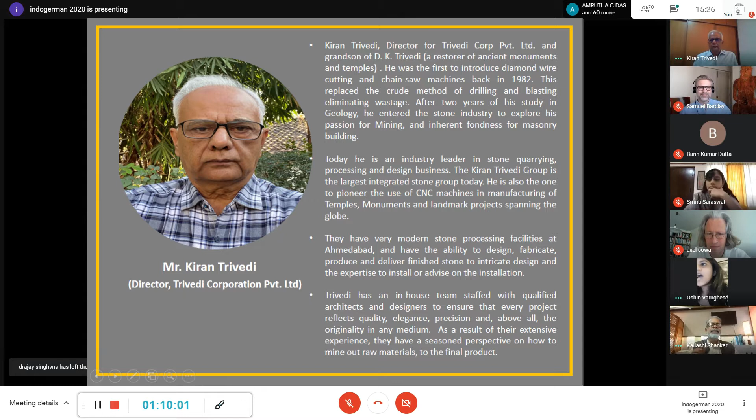Mr. Kiran Trivedi, director for Trivedi Corp Private Limited, was the first to bring mechanized marble quarrying and fabrication of stone to India in the 1970s. After 2 years of a study in geology, he entered the stone industry to explore his passion for mining and for his inherent fondness for masonry building.

Mr. Trivedi revolutionized the marble industry in India. He was the first to introduce diamond wire cutting and chainsaw machines back in 1982. This replaced the crude method of drilling and blasting, totally eliminating wastage. He's also the one to pioneer the use of CNC machines in the manufacturing of temples, monuments, and landmark projects

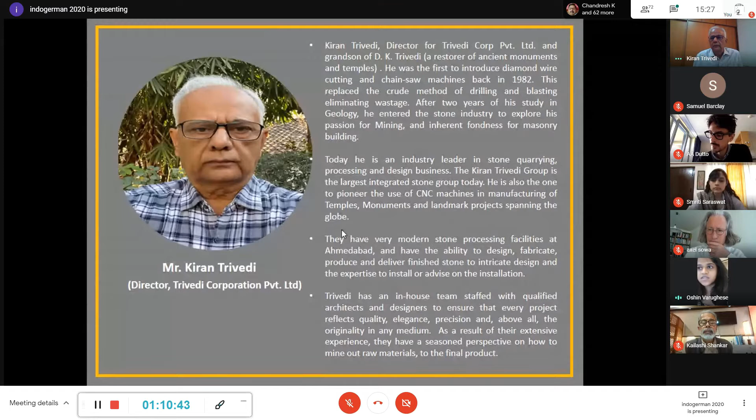spanning the globe. Continuing to lead, he is the very first to bring the process of underground marble mining to India. And through his technology, he will continue to innovate and shape the way the industry is run here. May I now kindly call upon Kiran sir to give his talk, Art of Using CAD CAM Technology in the Stone Industry.

Hi. Hi, everyone. Hello. You can check now. Hello, sir. Okay. I hope you can hear. Hello, this is Kiran Trivedi here. Yes, sir, we can hear you. Okay.

I would like to start with some old. I'm into the marble quarry mining, and then started the CNC technology. And basically, we are the temple architects since my grandfather's time. So, I would like first to share one picture, an 80-year-old picture, when the Ranakpur temple was built, with all the architects and contractors who did the Ranakpur temple. I would like to show you some pictures of the Ranakpur Mandir.

See, when we talk about this Ranakpur temple, we consider it one of the best temples in architecture, as it has a very big building with more than 1,000 columns, and the best art here. The levels are different. It is known for the levels and the lights. This temple is more than 500 years old.

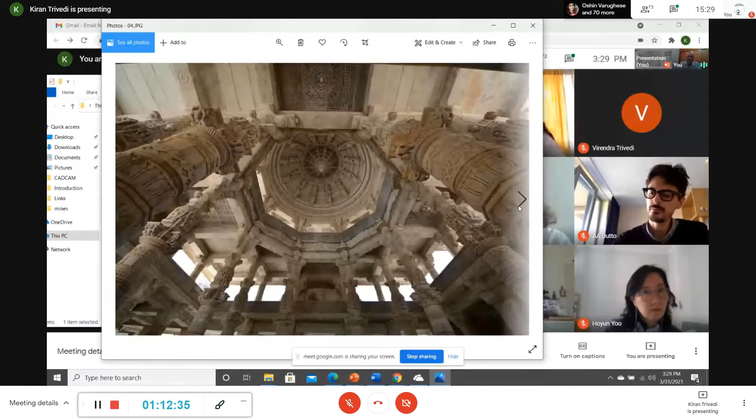And my grandfather did the restoration of this temple. And that's how it became at that time the school of architecture, where people were learning about temple architecture. Because in temple architecture, we don't use steel at all. By not using steel, the life of the monument goes to more than 1,000 years. So temple architecture is completely different, without using any steel.

I just put the quarry. These are a few more pictures of this Delwara temple. We'll move to the marble quarry. In marble quarries, we have this quarry. We have been working in this quarry for the last 70 years.

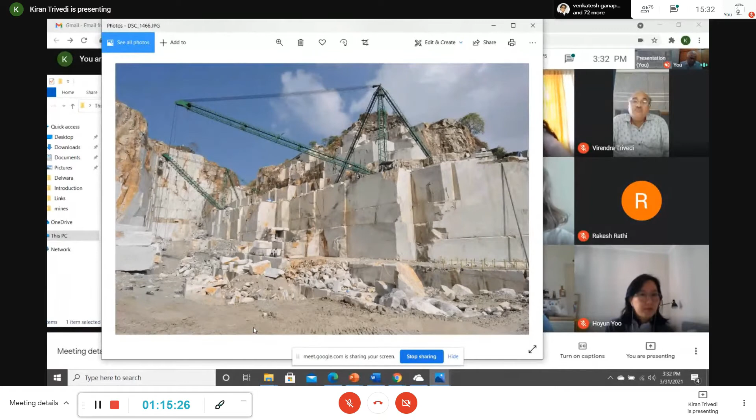If we take the stones for a beam horizontally, then there are chances of breaking the stone. The stone can break, the beam can break. In sandstone, which is a sedimentary rock, the stone should be used horizontally. Anyway, we don't get sandstone in vertical formation. But in marble, it's very important that we use the stone vertically by understanding the nature of the quarry, because all the cracks run vertically, not horizontally.

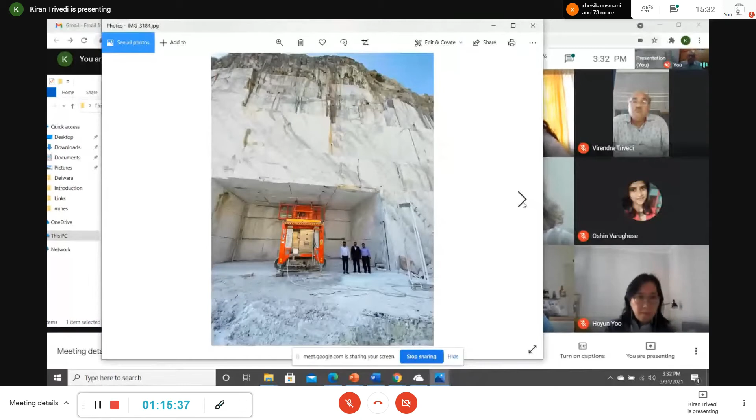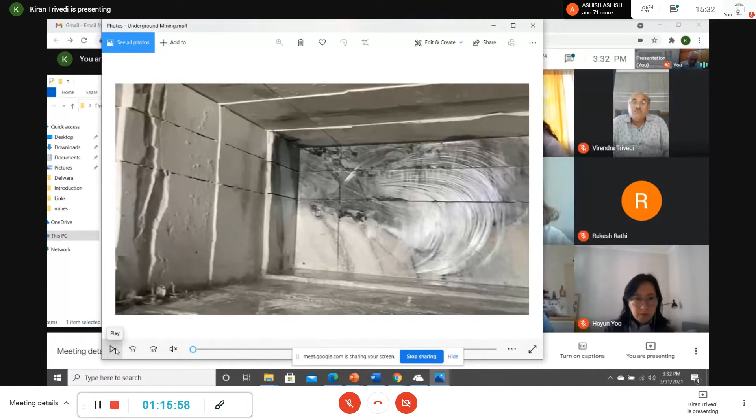That's the reason. So now I move to the underground. We have these quarries and underground tunnel mining in Europe, in Italy, and in many countries. It's been going on for many years. But in India, it's the first time we are going underground. We made an underground tunnel. The purpose of an underground tunnel is when open cast mining is not feasible, when the overburden is too much.

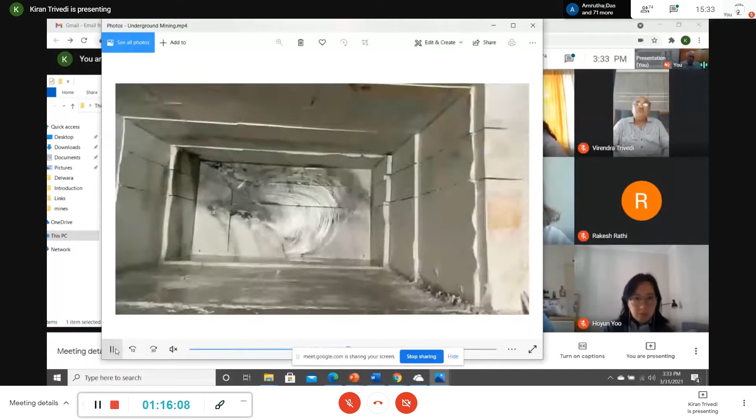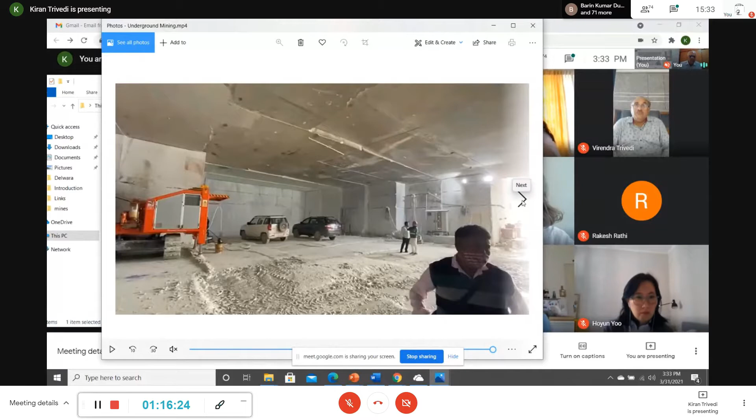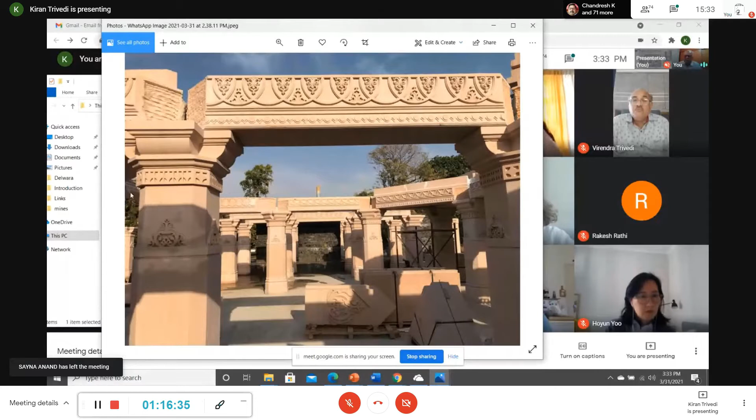So this is what we did, a tunnel inside, and we have a special machine for that, again from Italy. It's a chainsaw machine. It moves in the 5.5 meter height and goes 3 meters at a time, and we can go any length. So this is the first underground marble mining quarry in India. We started 2 years back. This is one temple, and regarding the beam, mostly the structure is columns, then beams, and then we construct the domes on that.

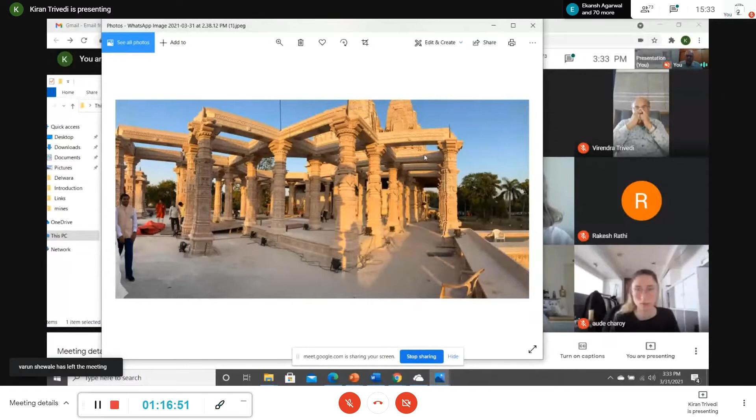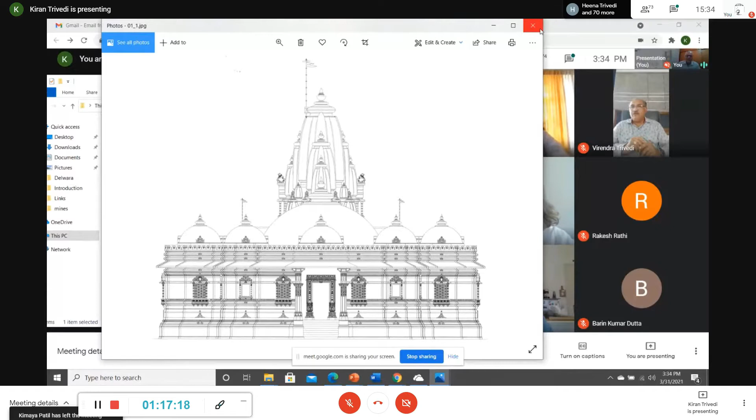We did many projects. This is the first CAD drawing we did around 25 years back. In the old time, the drawings were done manually, and first we converted this image, we vectorized the image, and this is the first temple we did in UK. That's the Krishna temple, where we used a CNC machine for the first time to build this. Next.

Like we have in the old time the Delwara temple, when we talk about the Delwara, we talk about the Ranakpur and all, we see that good workmanship, and they were very good artisans. My goal, I want to show what we are today, how we can do something better. Of course, they were the best, but we can say we are better than ever. We have the best technology today.

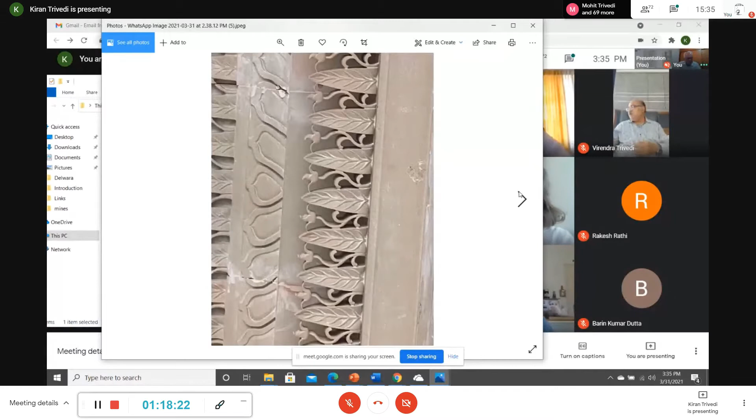So I tried here to use the CNC machine and water jet. So we combined manual and CNC and water jet together to give the best result. You can see here the ceilings, and we did it in a different manner. We use some technology. Everything is done with manual and CNC both. We use the CNC machines 80%, and the rest is manually done.

Now, when questions come from people, when we use CNC machines, what happened to the artisans? But when I did this temple, we employed around 300 artisans after we finished the CNC work. So all the CNC machines we talk about, they do not replace artisans, but they help artisans. Okay.

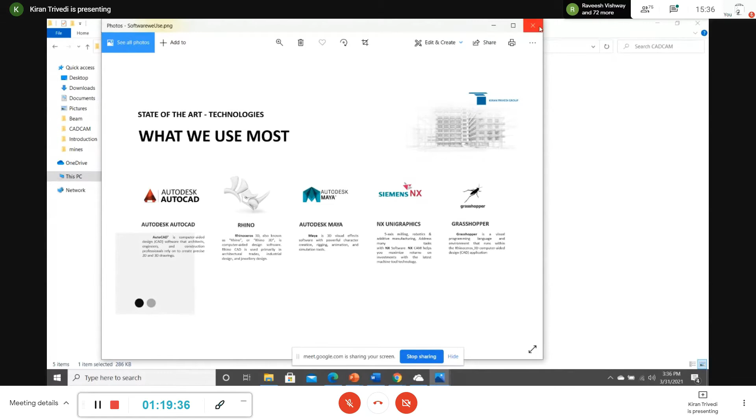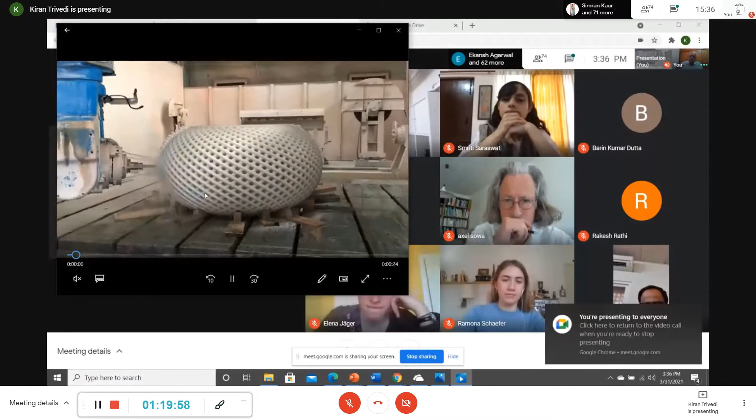We use the softwares. For the CAD side, we use AutoCAD, Rhino, Maya, Unigraphics, and Grasshopper, and mostly ArtCAM is used. Now the way we use it, this is one of the examples. This piece is designed in Rhino, and we are machining with the 5-axis machine.

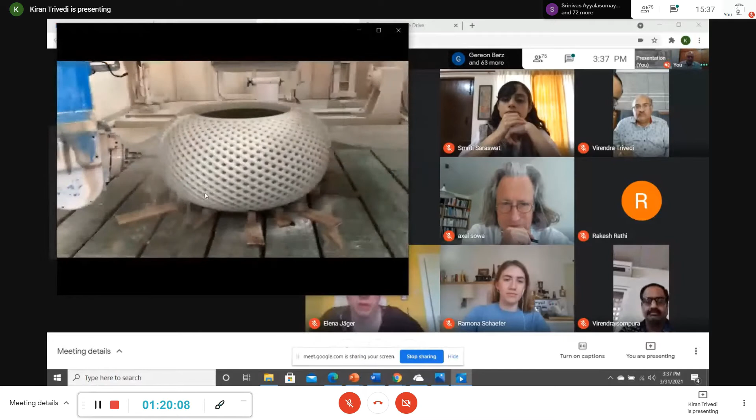So how to use CAD-CAM, and how to take the best advantage of designing and doing the machining, that's very important. Many people have the machine, but they don't know how to take the best advantage of that. When we talk about machining, the main part is the costing, of course: how to make a piece economically, how to reduce the timing of the machine, because these machines are very expensive. So we reduce the time of the machine by learning, and every day we learn how to use the machine and what software we should use.

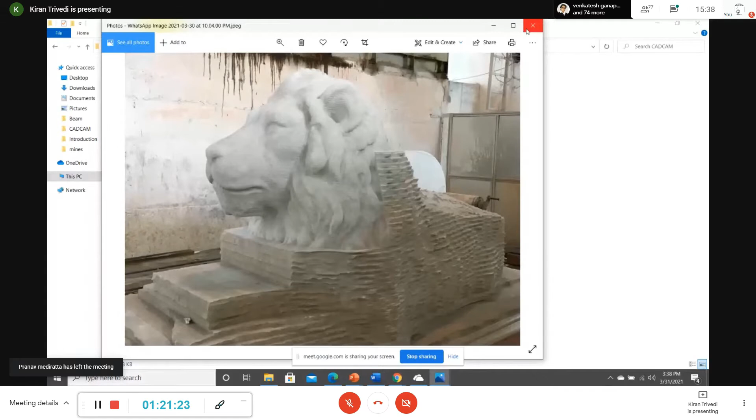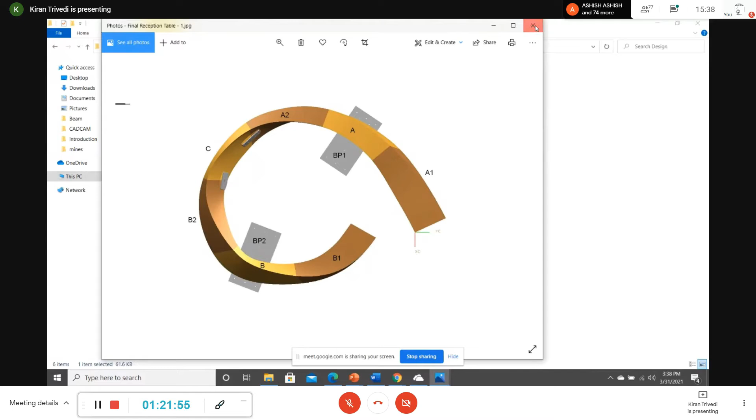Okay, I would like to show you one very interesting project we did. It was in Harvard Medical School, Dubai. This table is 5-meter diameter, and the first time we used Unigraphics software. The table is resting on 2 points. It's designed by a British architect. We put some steel inside, and I will show the real image. This is how the software and the CAD-CAM system helped us.

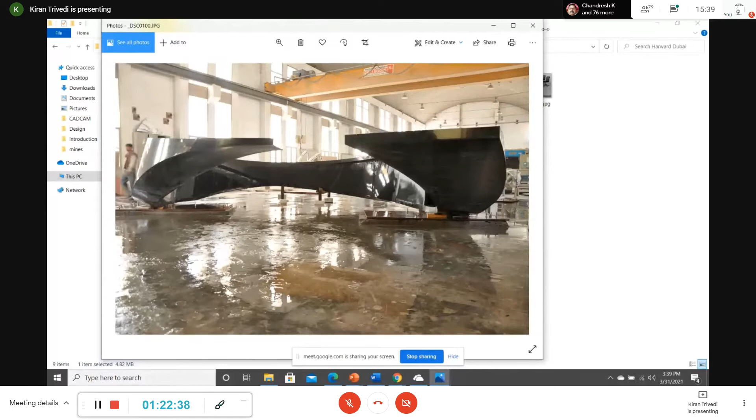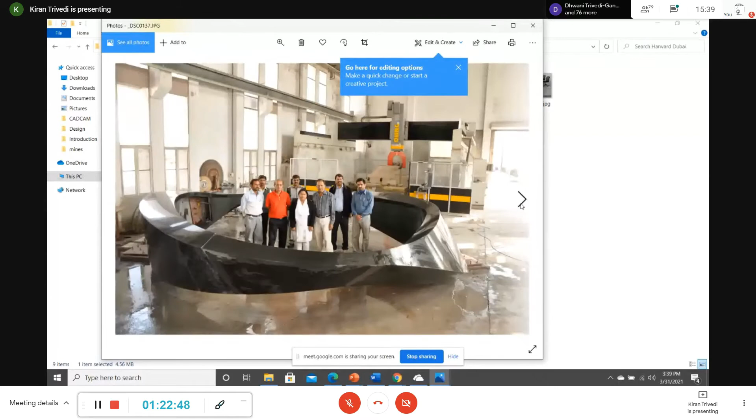Here we go to the picture. This we installed in our factory to do all the tests. This cantilever is 3.5 meters. One solid stone is hanging and resting on these 2 points only. Yeah, you can see this is resting on the 2 points. Go back. What stone is that? It's a black granite. Yeah. And this one is the installed piece there in Dubai.

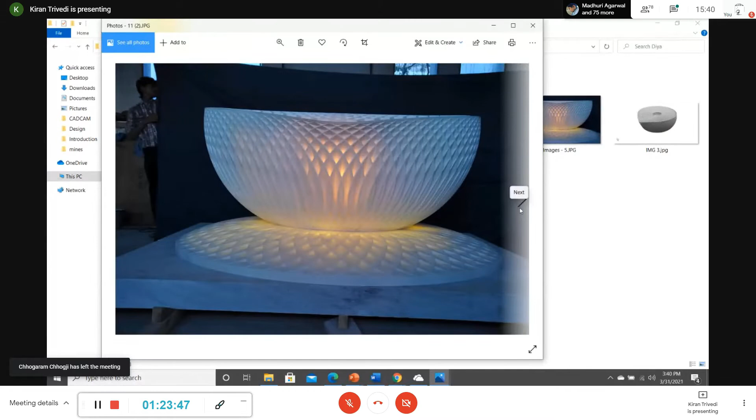So the thing I want to convey is how this new technology with the new software helps in the stonework, and how to use this software, the designing software as well as the machining software. This was designed in Rhino. We did the design; it's installed in Delhi.

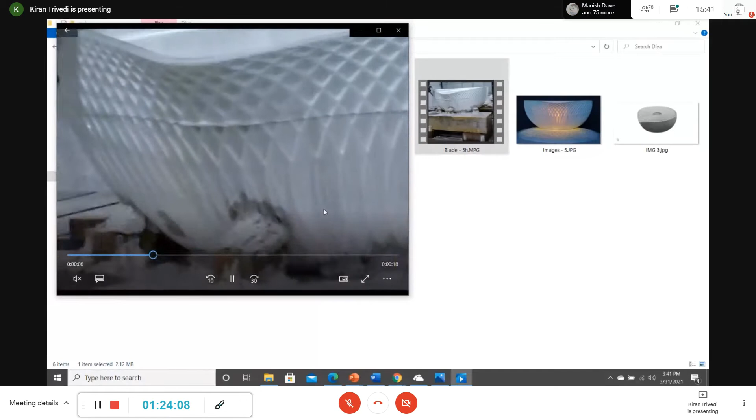Again, this is machining. The product is designed on Rhino software. It's marble. Is it marble? So is this for the Ministry of Culture? Yes, that's the same. Yeah, I recognize that one. So we put this too. Preksha Vaid designed it from Delhi, and she did this project. She's an architect in Delhi. Okay.

So when I talk about scanning or any software we use, finally what we need is the STL format file. The machines where we use the program, the Easy Stone program, read the STL format file. So whether we use Rhino or Unigraphics or any other software when we want to do 3D, we always need an STL format file, which the machine can easily read. Okay, then.

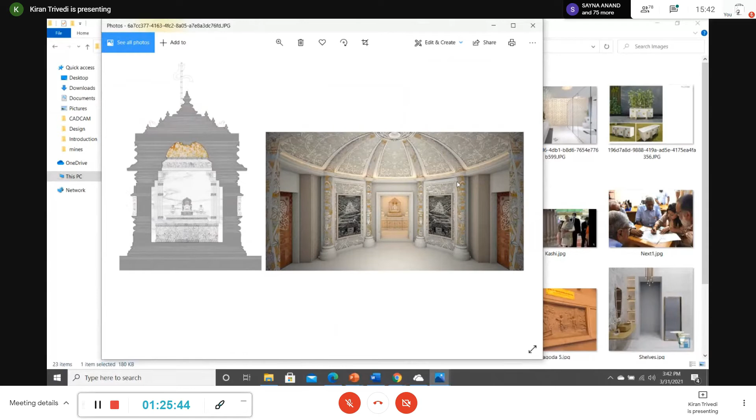This is the new temple we are doing. My daughter, in fact, is an architect and she designed it. And we are using two stones there. This we are going to start soon.

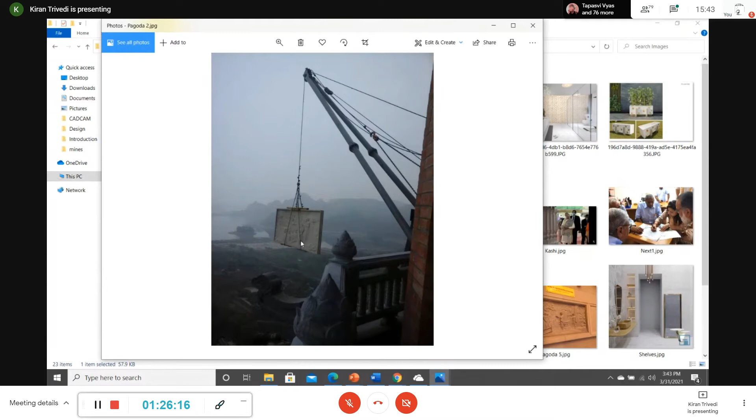Then this one is a pagoda. We have not restricted ourselves to temples only; we did a few gurdwaras in England, one in Glasgow, and 3 big pagodas in Vietnam. So we studied the Buddhist culture. We did these panels. First we made them in clay. After that, we scanned them, and after scanning, we did them with a CNC machine.

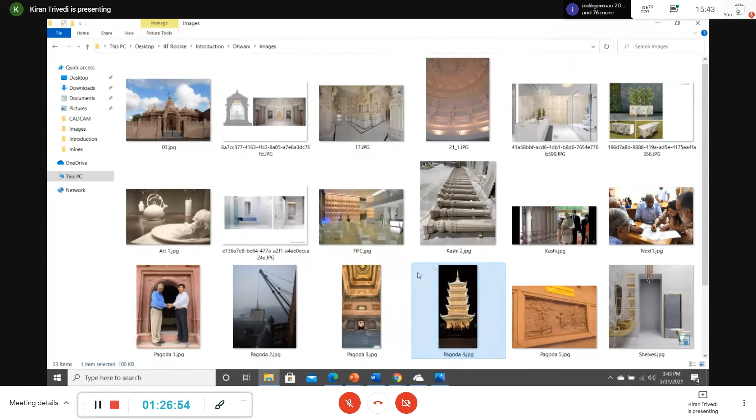This is one of the recent pagodas we finished last month. It's a 5-story, 100% done in stone, the same way as the Sompura architecture. No steel is used inside. It's 5-story, 100% granite, red and black granite. We finished in the COVID time because there was no COVID in that area.

Oh, this is one of the ceilings we recently did using the technology of water jet and CNC machine.

This is one project going on right now, the Kashi Vishwanath temple. Of course, all the columns are done on CNC machine, but when I talk about the CNC machine and the manual craftsman, after doing it on machine, about 15% we spend on manual carving just to finish it. Today more than 150 people are working just on finishing the carving done by CNC machines.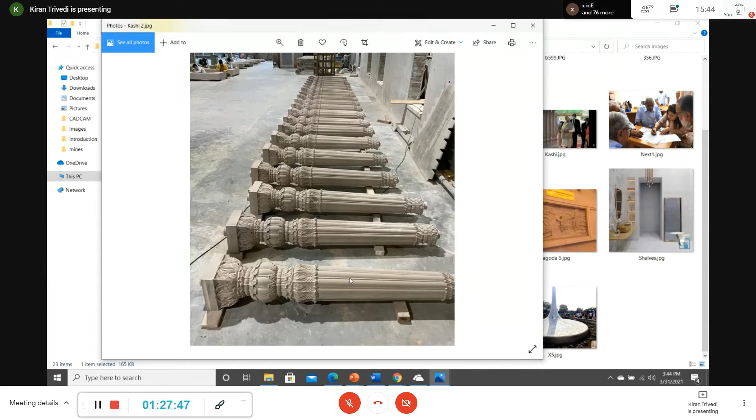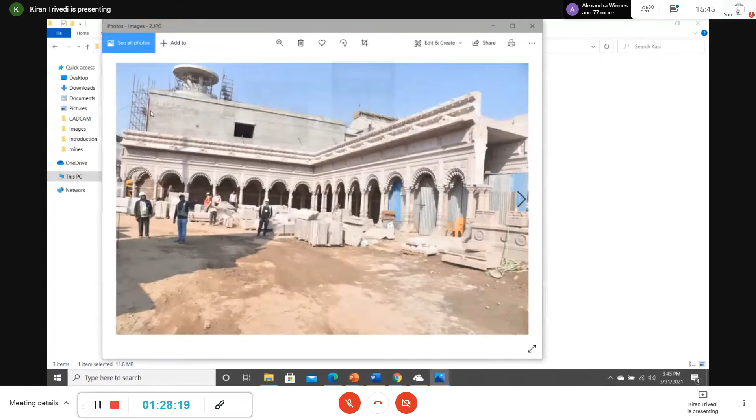These are a few panels we put in Vietnam. We did them first in clay, then by CNC machine, and finally finishing manually. These are some pictures of our recent project going on in Kashi. You can see the columns; everything is under installation. Finished in 2 months' time.

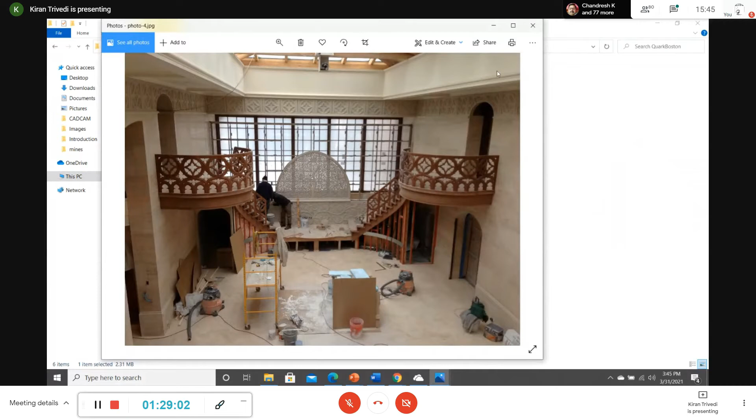This is one of the projects we did in Boston, a listed house. For this jali, again we used the technology. We took a photograph and then used the big water jet machine. It took around 1 month to finish this, and then CNC machine and manual carving for the surrounding. And of course, everything finished manually.

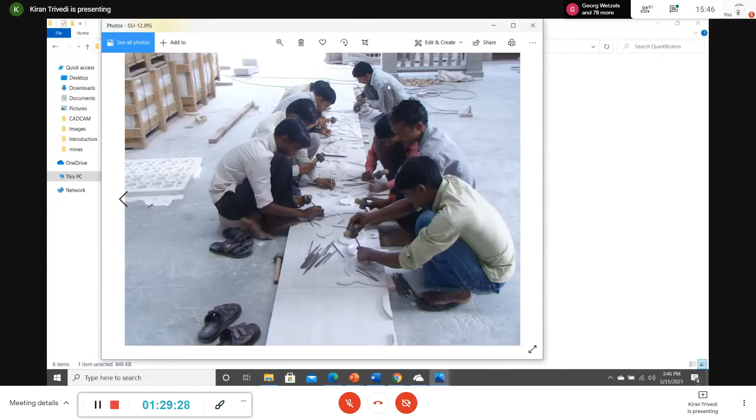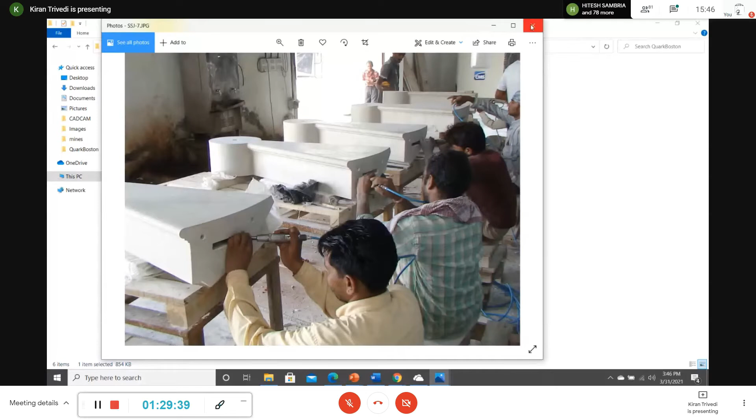And a very interesting staircase also in the same house. And this is the surrounding of this jali. This is a very famous jali in Ahmedabad, the Sidi Sayyad jali. So we replicated that, and it is installed in this house. Yeah, almost.

Okay, thanks. Any questions? Can I stop? Is it okay? So do you have more slides or projects to share, or can we already start? No, I have enough, because I'm in Hyderabad and I asked my people to send it on WhatsApp. So that's what I shared with you right now.

Do you have any short video clip showing the working of the CNC as well as the hand tools? Yeah, I have a small video, 1 minute, something like that, which can show my factory.

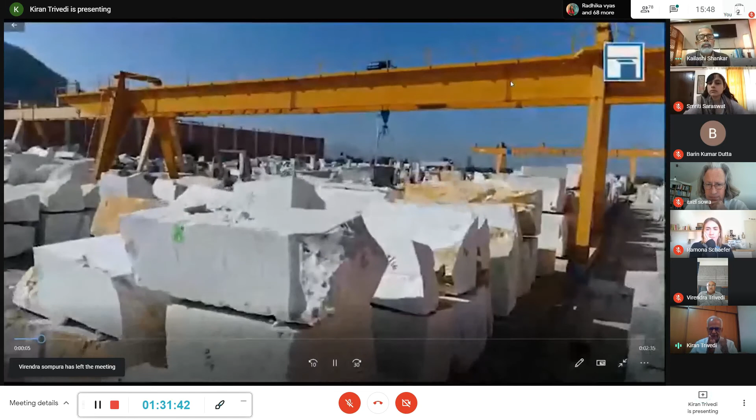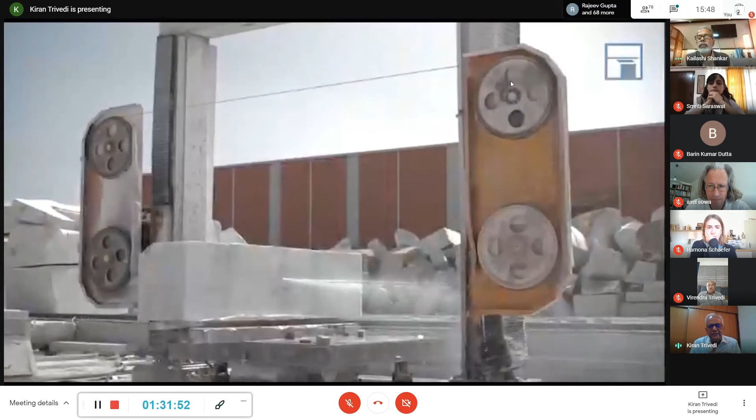So this is a small video. We have this factory at Ahmedabad, sorry, Abu Road. This is a factory. We have 2 cranes and one CNC and the marble cutting machine. These are the blocks we take from our quarry. Then we have some wire cutting machines here. This factory is in 120,000 square meter.

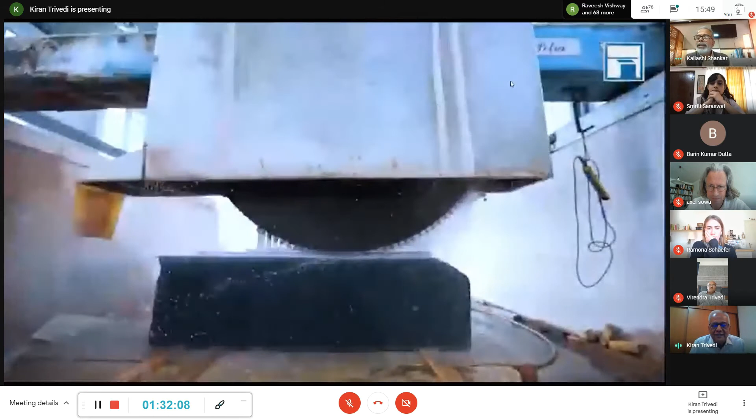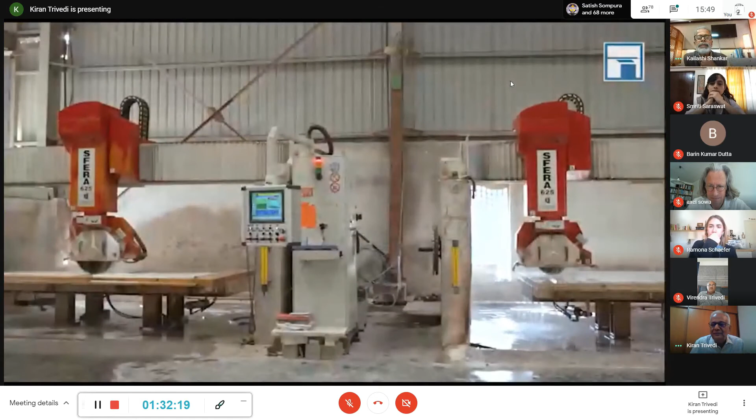We have an architectural team with Mr. Manish and Mr. Virendra Bhai, and my daughter Dhwani Trivedi. She did from Rhode Island School of Design, and my son Manan Trivedi, he's looking after the production there. And so these are the CNC machines. We have around 20 CNC machines for different type of work. This is a tub we made in a single piece.

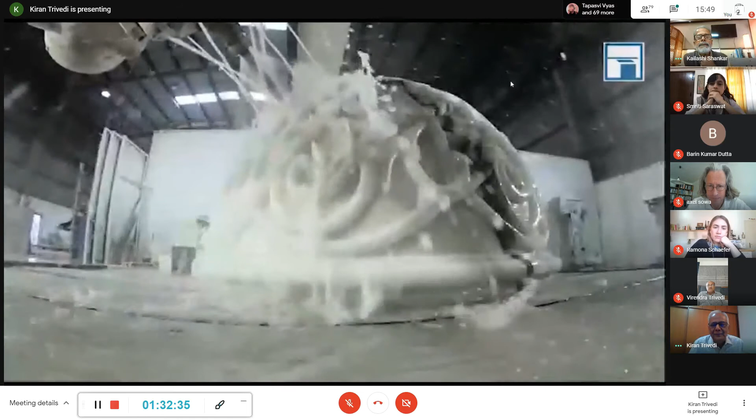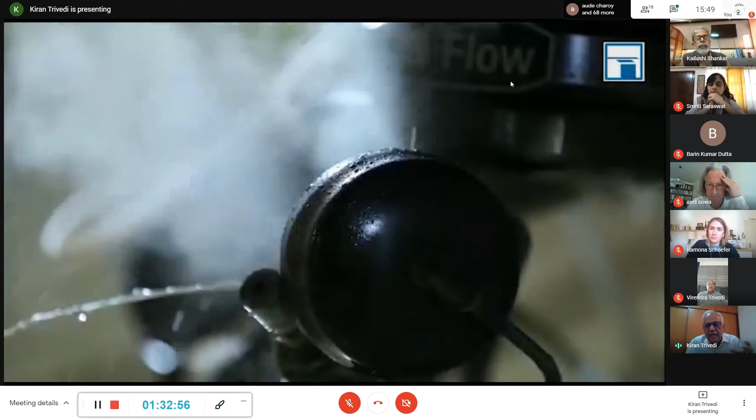I just wanted to know, while we see this, you said you have a stone quarry, a marble quarry, no? Yeah, marble we have quarry. See, this is how we make a column. We do the column cladding. So it's with a diamond wire machine. We first cut it, and then after that we do the shoulder cut on another machine.

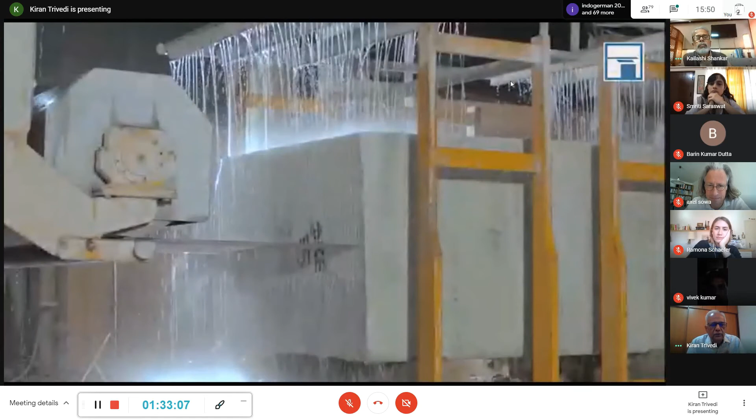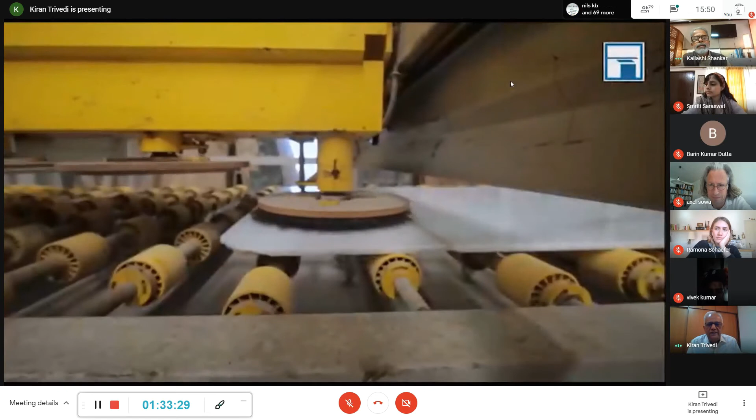This is a 5-axis water jet machine. We have 2 5-axis machines. These are the gang saws, and this is a multi-wire machine where we cut marble. We have a slab factory. So these are the 3 marble gang saws. We have an automatic polishing line. We have a resin line, where we produce around 10,000 square feet slabs per day. So these are the automatic polishing lines.

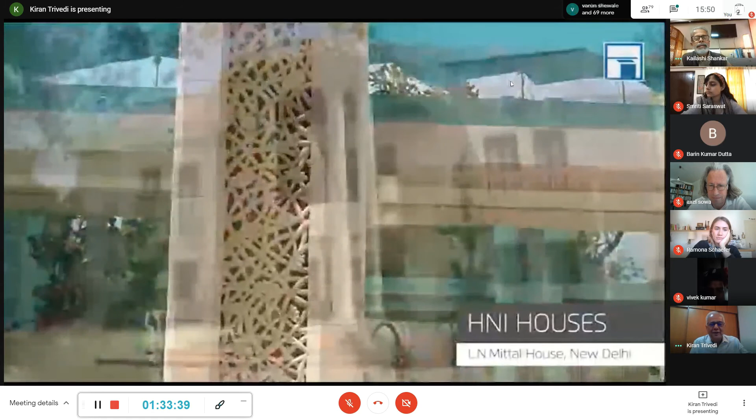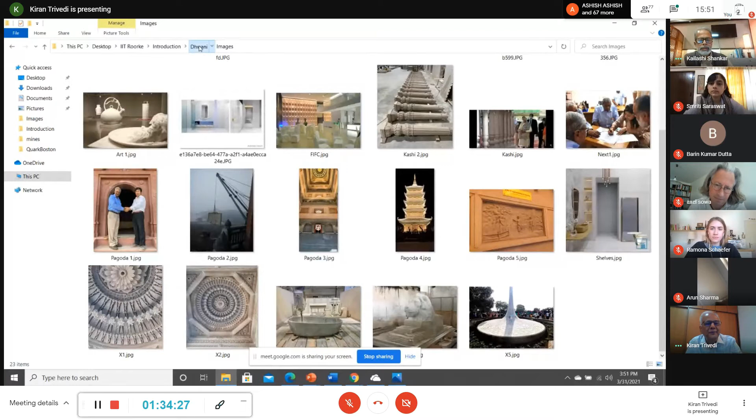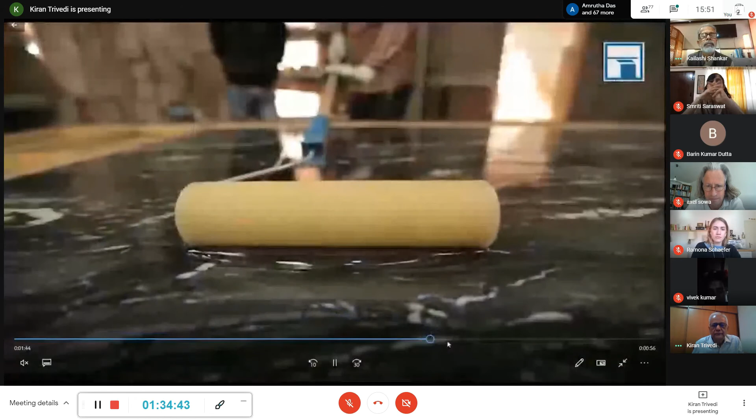Because we did some temple. Utah, where is it? Tell Dhwani. Go up. No. Maybe in installation. Anyway, go to the same video. We had some. Get this. Stop.

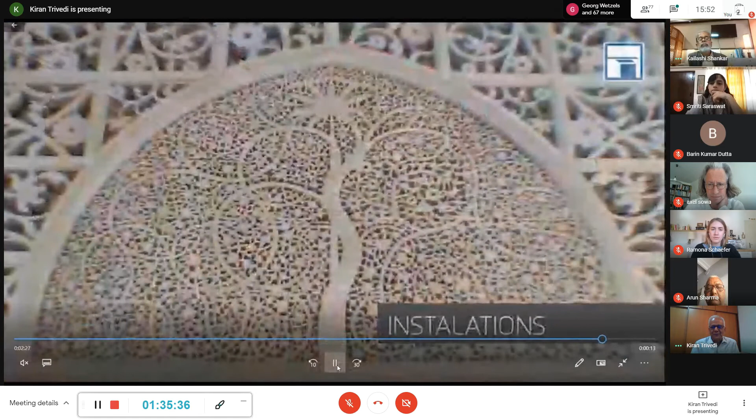These are few temples. You can see everything on my website, trivedigroup.com. Yeah, this is the residence, Amangiri Resort in Utah, USA. It's around 200 villas. We did it in Gwalior sandstone and Kota stone. This is a Gurdwara we did in UK. We used granite. This temple in Bhuj. Okay, so this is the short video I have. Sure.

Getting back to what you said right in the beginning, you showed a beautiful, very old vintage photograph in front of the temple. What is it? Ranakpur temple. Yeah. You said that you have your family of temple architects, sthapatis, people connected with stonework, right? Yes. I would like to know how long have you been involved in this industry?

Now it has become more like an industry. The operations that go on inside the premises are more like industrial processing, cutting, shaping, and the computerized mechanical work. So how did it start as temple architects, masons, sculptors and craftspersons, and slowly come to people who do everything from quarrying till designing and even constructing? How did it transform itself into what you are today? That's what I wanted to know.

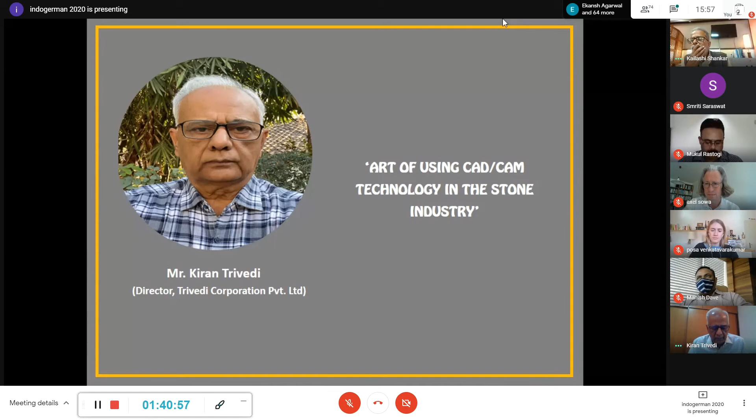So both are directors in my company. So I have a good background and a good team to work on the CAD side and a different team for the CAM side. How big is your group now, and how big is the architectural wing? It seems you employ a lot of architects. Right now, Virendra Bhai, they are taking care of the temple architecture and some monument architecture.

Okay, I hope you can hear me. Yes, yes, okay.

And my daughter lives in Boston. She did architecture from Rhode Island School of Design, America. And she's been with me for the last 20 years, taking care of the design part. My son is also very innovative. He has a showroom in Mumbai with Gauri Khan, and he's also taking care of the manufacturing in Ahmedabad. He's in the same line, so that's how we work.

I have two small queries. One is, right in the beginning you showed quarrying. You started what you call deep mining, tunneling into the quarry site. When you use such large machinery to tunnel, something like 8 meters by 6 meters, it can tunnel around 30 meters inside. So it creates huge spaces. Does it create tunnel-like spaces, or chambers?